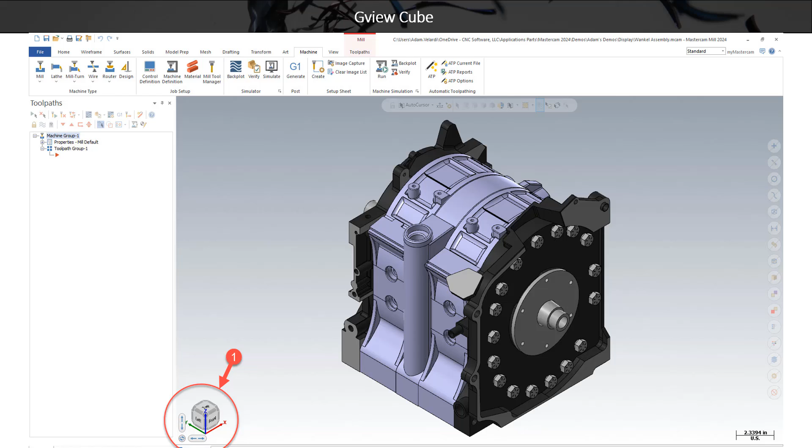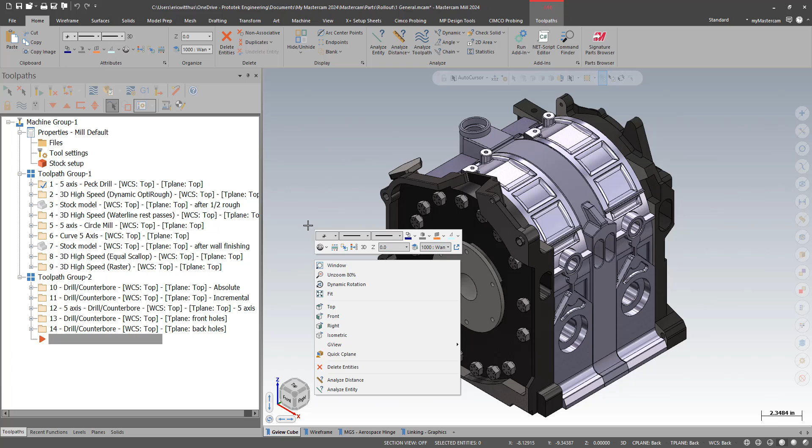So the first thing you can do with this new cube is you can, say, click on the right graphics view. That'll look at the right side of the part. So you can simply click on the cube and go to that graphics view. Now this is the same as choosing the graphics view from the right click menu or from the view menu up on top. They are related to the current WCS.

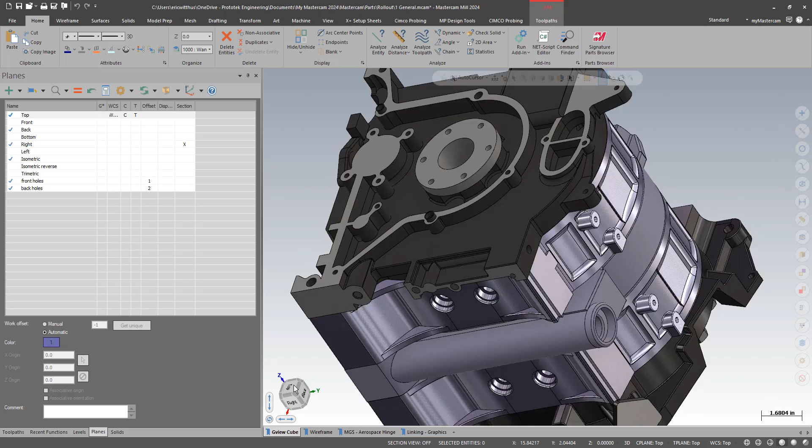So if you look right now, I'm at the top of the current WCS. If I go change my WCS, I'm no longer on the top of the current WCS and on the back. There's the top of the top WCS. Also, like changing your graphics views, it will follow your rules. So if you have rules set to change the planes with the graphics views, the planes will change as well. I have those rules mostly turned off.

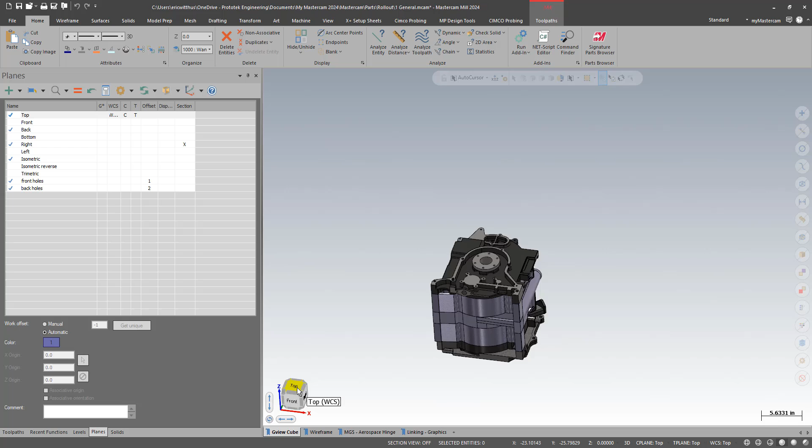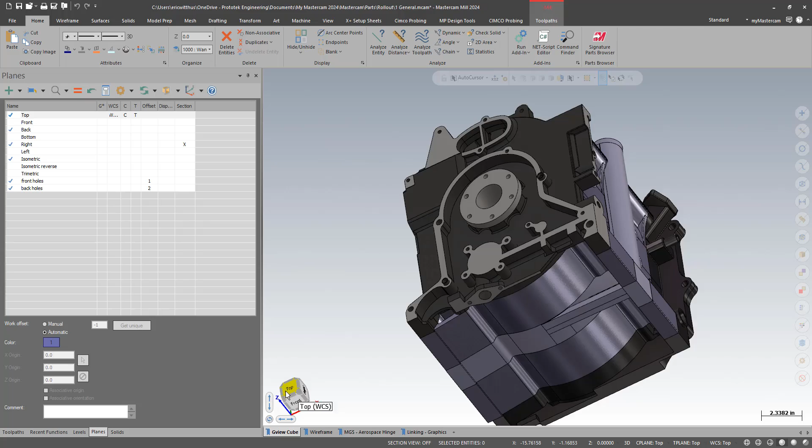Another thing you can do with the cube is you can double click on the cube and it will fit your screen. You can also, much like pressing the wheel and moving the mouse around, left click and drag your mouse around to rotate the part. So you can click on the cube, hold the button in, and rotate the part.

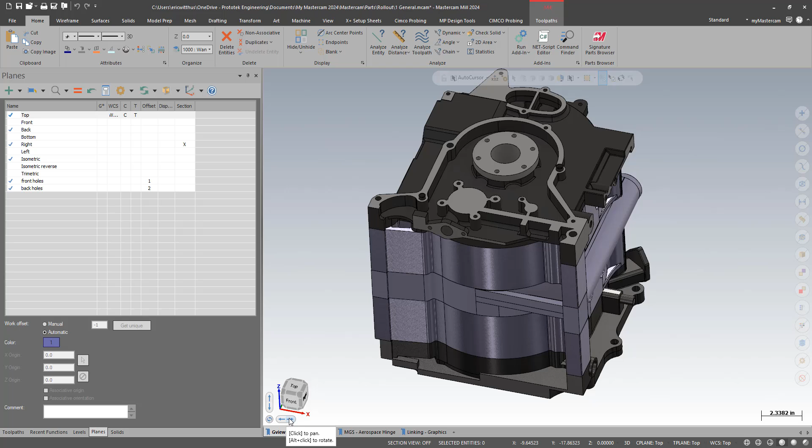There's also some additional buttons near the cube here. I have some up and down arrows, left and right arrows. They pan the part. If I cursor on that for a second, I can see that if I press the Alt key and click on the arrows, they rotate the part. I also have another button here that does a 180-degree flip on the part. And if I cursor on that, I see that that has a variety of options as well.

We also have a right-click menu with this. I can turn off the cube or right-click show the cube. I also have settings in here where I can change the size of it and the translucency. So that's the new Gview Cube for Mastercam 2024, just a new interface element.

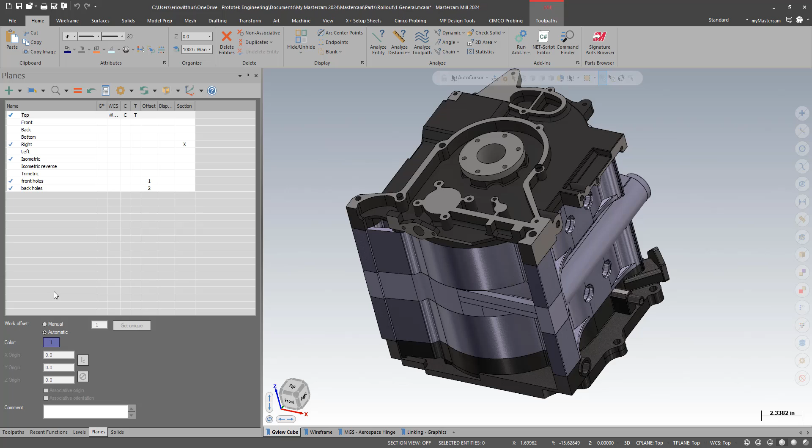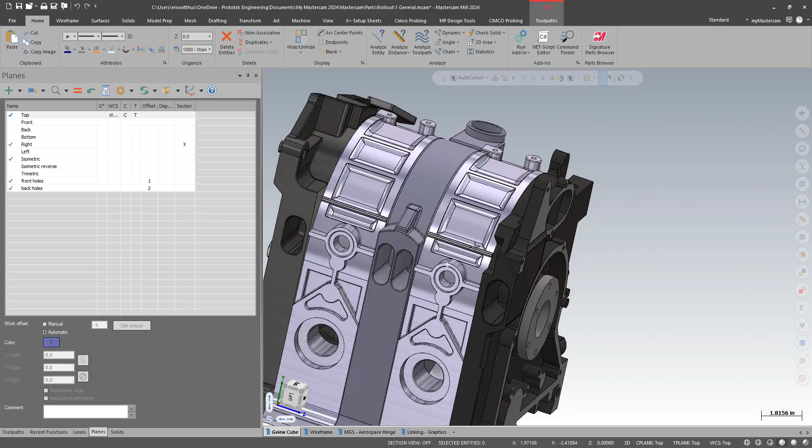Another new enhancement to Mastercam 2024 is they have changed how translucency works. There are no settings related to this. Just when I go to translucent down here in the corner, the main thing that happened is, an easy way to talk about this is to talk about shading. I have two different shading methods here. I have just plain shaded and outline shaded. And when I'm outline shaded, it looks like a wireframe on the model.

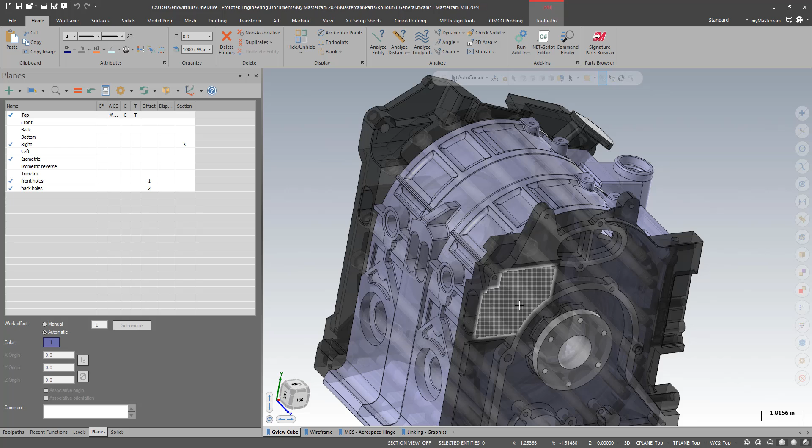I do like the outline shaded. I think it's easier to see the definition of the shapes, but it's putting those wireframe looking edges on everything. And in past versions when I went to translucent, those edges stayed bold. They didn't change. Now in 2024, when I go to translucent, the outline shaded edges also go translucent, making it a little bit easier to see into the model.

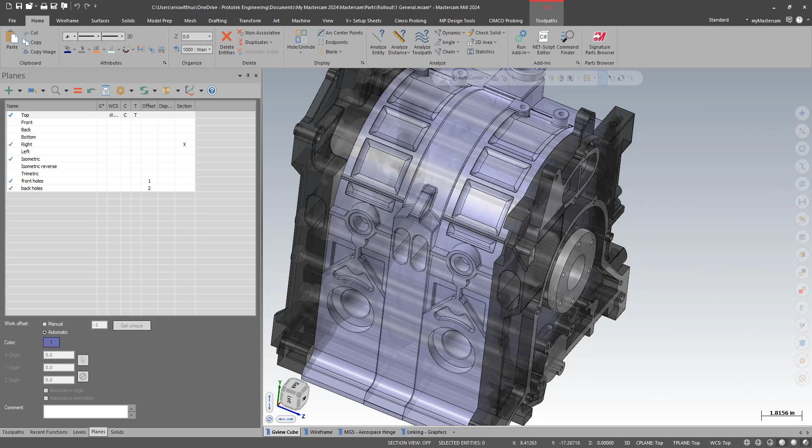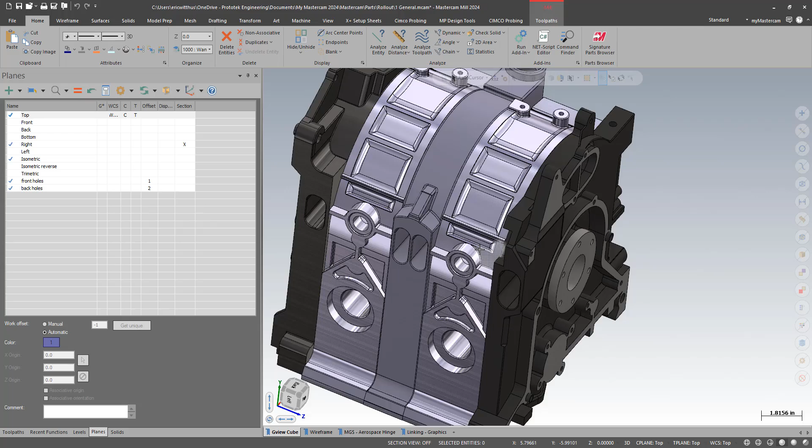In running the rollouts, not many people are using the material function. The material function is really just a graphics enhancement, but there is some functional use for it as well. So this is not new for Mastercam 2024. We've had this for a few versions, but I can now go to view and I can turn on view material.

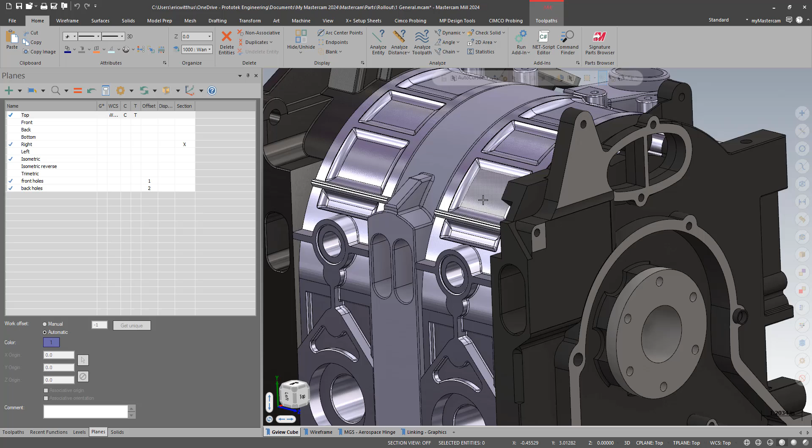And then I can set various materials in Mastercam. So right now these are mainly metallic materials, so they kind of appear shiny. So it's really a graphical function, but where it can come in handy or be useful in a practical sense, not just in the way it looks, is I have glass material types.

So we just looked at translucency, but that's everything. Everything's translucent. Maybe I have an assembly like this and I just want a few components translucent. That's where glass comes in pretty handy. So I already have my material turned on in the view page. So now, for instance, I could pick that part of the assembly right there, and then right click. This also can be found on the home page, and I can set that material.

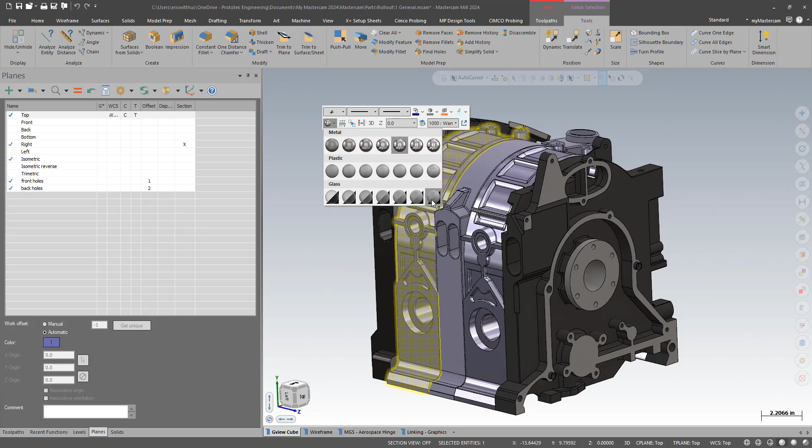And then I have various levels of translucency inside the glass material as well. This is the least translucent, so I'll set that, and now just that one component is see-through. I could pick that one as well. Maybe I'll go kind of to the middle of the range of translucency there, so that one's more translucent. Maybe I'll pick this front plate here, and I'll set that one to this one.

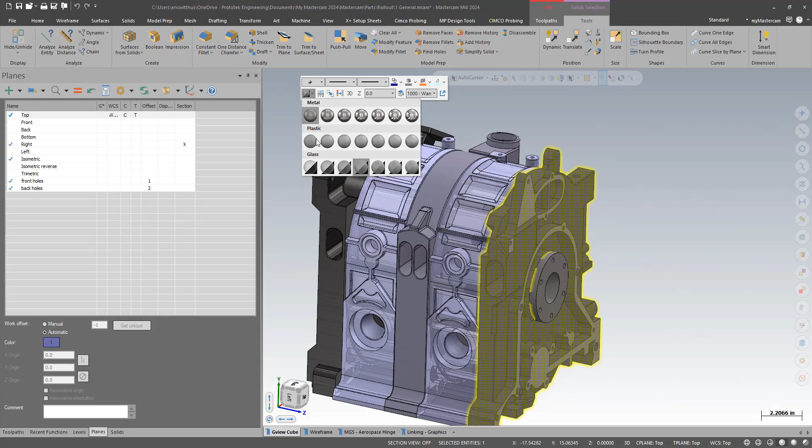That's the most translucent. So that's not new for Mastercam 2024. I just wanted to show some practical uses or give you some ideas of how that could be used. What's new is in the config, there's a translucency slider for the glass material that affects the overall translucency of these.

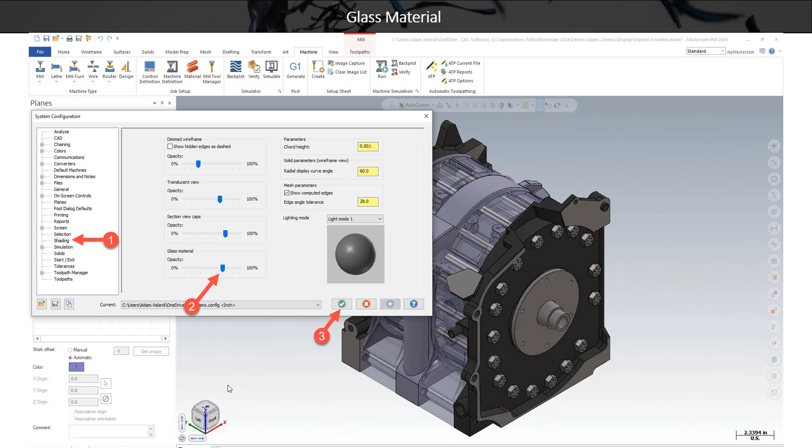Next up, we have some dynamic trim enhancements in Mastercam 2024. If you've been using Mastercam for a while, remember the old trim break extend function. This is basically very similar to that. They added a new trim function to the wireframe ribbon in Mastercam 2024, and it's in the first place here. You still have your other trim functions as they were before. This just adds a new one, and it's basically like all the trims in one.

You do have a trim break function. It breaks, shortens and lengthens, but if you shorten it, it leaves the part that would have been shortened behind, so it turns one into two. Or if it lengthens, it creates a new line. And then you have all your different trim settings here. Now, there's what it kind of looks like in the interface. They did a little modification of wording here.

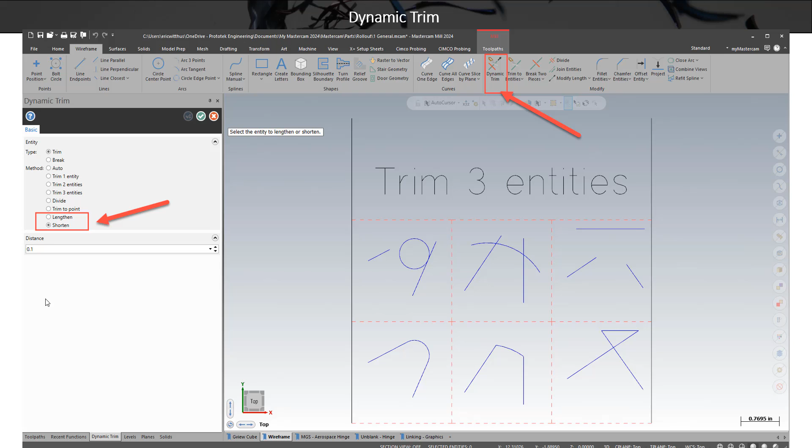It's not a functionality modification per se, but we always had modify length, and if you put a positive number in, it would lengthen. If you put a negative number in, it would shorten. And maybe that wasn't super intuitive to use a negative number to shorten, so they've changed the wording on it. Now it's lengthen and shorten, and it's always a positive number. No more negative numbers to shorten.

We also see some machine group setup enhancements in Mastercam 2024. In Mastercam 2023, you probably noticed, and we talked a bunch about it in the rollouts as well, they basically completely redid the machine group setup. At that time they mentioned that this is just the beginning. There was going to be more stuff as future versions rolled out. So we have additional stuff once again in this version. We see most of the changes to the stock page.

So for instance here, if I work my way top down, I can now have multiple stocks. I have some new ways of building stock, which are basically similar to some of the old ways we had that we lost in 23. They're back. We have the interface that we saw in 22 and older, where I have an anchor point and length, width. We did have this in 23 as part of the bounding box. We still have the bounding box function there. And we have some new push-pull functions that are pretty cool, specifically on the stock setup page.

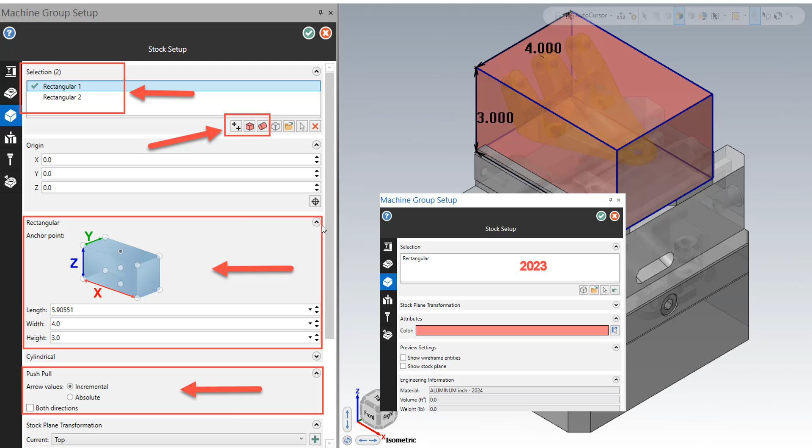So on the left is Mastercam 2024 machine group setup, and on the right, there was not much in the stock setup in Mastercam 2023. You really had to go into bounding box to get some of these options. Now they're back on the main page like they were in older versions. There are also some enhancements to the simulation page as well. Now we'll go back to Mastercam and take a look at all that. Since this is all pretty new starting in Mastercam 2023, I'd like to run through it all real quick.

So the main updates are on the simulation page and the stock setup page. But I'm just going to start on the file page, and this is where you can change to a different post if you want. The program number used to be on the tooling page. In 2022 it was, and last version it got moved here to this page. So you can put a program number in there.

I go to the master model. Now, what happened in 2023 is I did some of my job setup here, and then it was usually more often used if you were going to use machine simulation. You could set up fixturing and your machine simulation stuff by going into simulator options here. And instead of having two interfaces for this, what they did is they took all this stuff and they moved it into the job setup.

So if you're not doing machine simulation, you don't have to. When I get to here, for instance, my master model page, I don't have to set that up. Mastercam has a default mechanic where whatever levels you have active when you run simulation or run verify, those components go into verify and they're considered the model. And then once in verify or simulation, you can hide or make the model translucent. But basically everything that's on the screen is going to go in as the model.

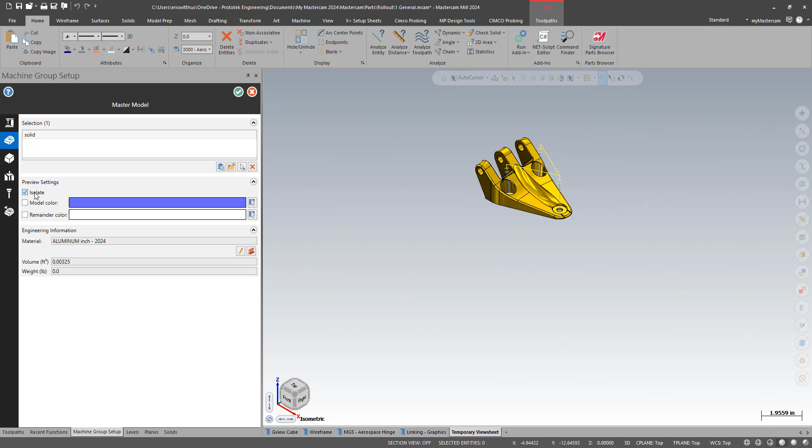So here I can just select from my screen. I can say that's my master model. I can do some stuff here. I can isolate that. I can force a certain color on it and a remainder color to help identify it. You can set a material here, and that just gives you the volume and weight. But I'm going to move on down to stock setup.

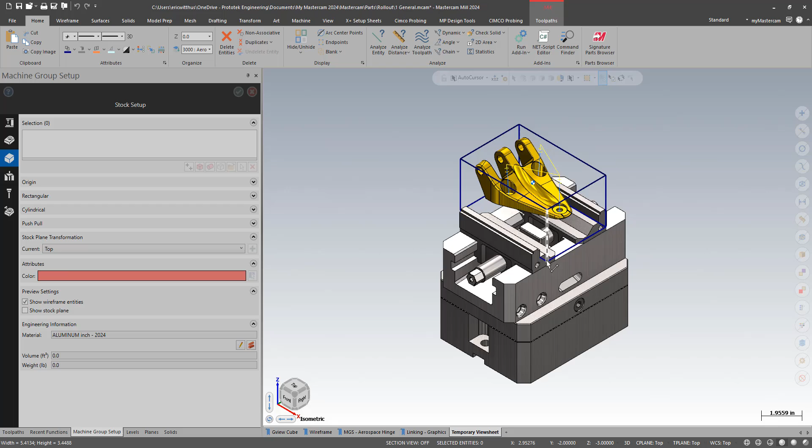Here's where I see a lot of my changes. One of the things that I used to have in Mastercam is I can make a stock from 2 points. So that's back here. I can say add from 2 corners. I can make from that upper left-hand corner to the bottom right-hand corner. Get my stock in there, and then I have my anchor point there on the center. I could do something like go to a 7-inch stock, and it evenly expands. So I got that interface back, and then I have some more stuff too.

I'm going to come in here and say create rectangular stock about that part, and then I get a minimum bounding box there, but that's just to create a rectangular stock. I also have my bounding box function, which is the same as the previous versions. It takes me into my bounding box dialog, which now has a lot of similar things to this.

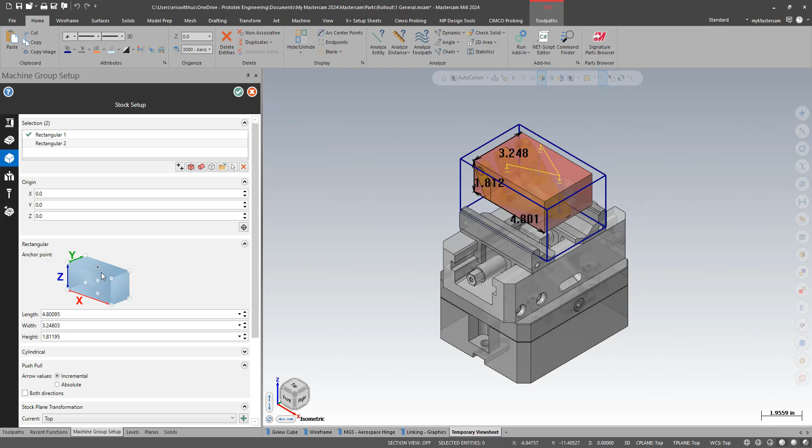So now once I have that stock made, you can see here I also can have 2 different stocks. Now that doesn't mean that they're both active. Only one will ever be active. So whatever the top one is, that's the active one. If you want to set another one as active stock, you can right click and set as active stock.

So this isn't really for Vise 1, Vise 2. I would probably still use stock model for that kind of stuff. This is more like maybe I made this part this time around with this size of stock, and then the next time I had to make it 6 months later and a different size stock got ordered.

And maybe next time I'll go back, so I could have different size stocks in there, and then switch between them as needed. I have some tool paths that work off a stock that could be affected by that. Like if I do a dynamic mill and I don't pick a machining region, it goes off the stock. Facing can go off the stock, so those would go dirty as I switch stocks, and then could be regenerated and updated to the current stock size.

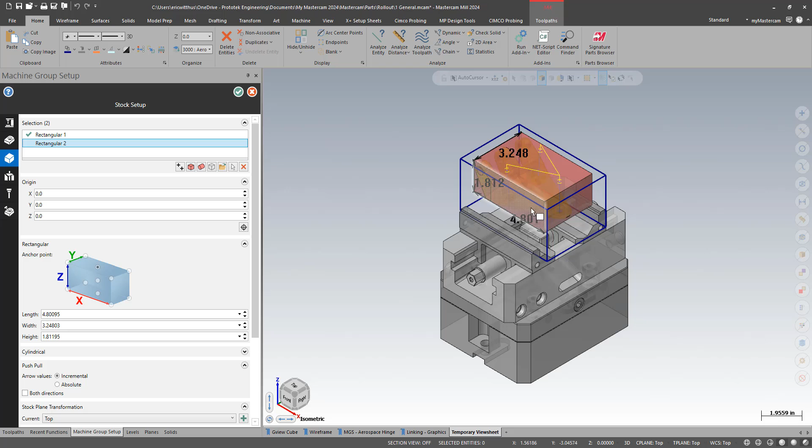But they're not simultaneously active, they're not both active at the same time. I can have multiples in there. Only one is ever active though. Whatever one is lit up here is the one I'm dealing with and editing on the screen. So I have the second one. There are some other cool things on this.

I can do stuff like push pull now right from here. Now this isn't completely new because you can do this kind of stuff when you're in bounding box. When I do push pull, you can see I'm incremental. I dragged that face up a 1/2 inch. I can also now push pull absolute. Down here I've got the push pull function, and I switch from incremental to absolute, and if I drag that now, look, it's starting at the actual size it's at now, and then I'm dragging it to actual size numbers.

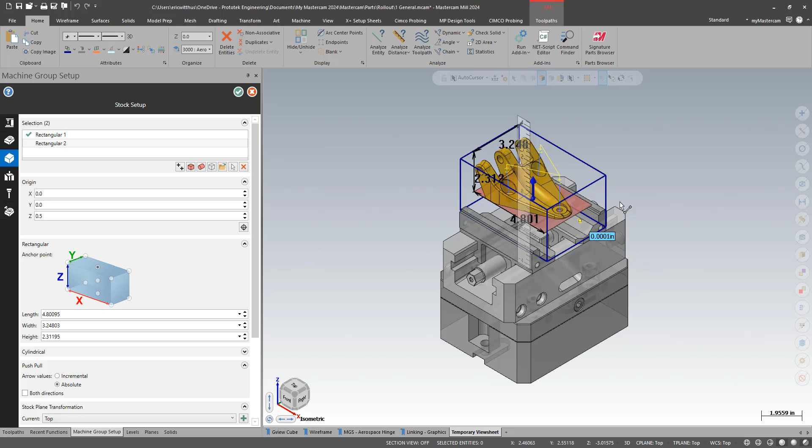Where that could be handy is on this outside. Maybe that's the overall length, and I could drag it to a nominal number. Now that's only going to drag the one side though, so there's another new option in push pull here where I get both directions. So now I could do something like absolute both directions. If I click on this face, I could pull it at kind of an odd number now. If it was an incremental value and I wanted to bring it to a nominal size, I'd have to do some math and figure that out.

But here, if I drag it now on absolute and both sides, I can drag it evenly on both sides to a nominal number. So I could drag this out to, say, 6 inches. Now I'm 6 inches overall, and it's centered. I drag both sides. So that's some cool new interface elements there on the stock setup.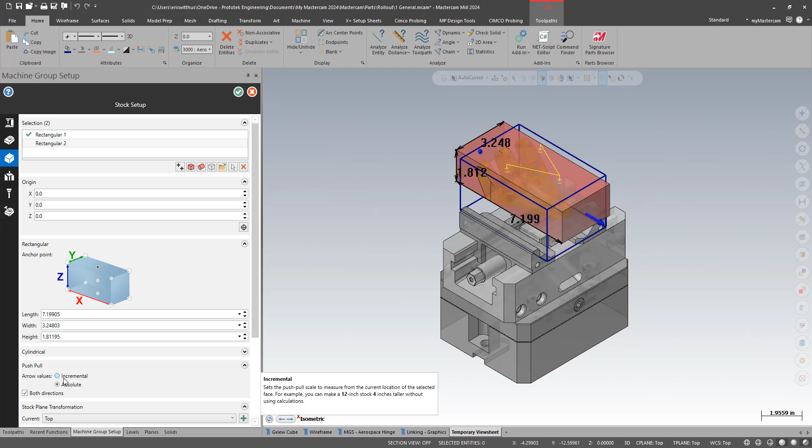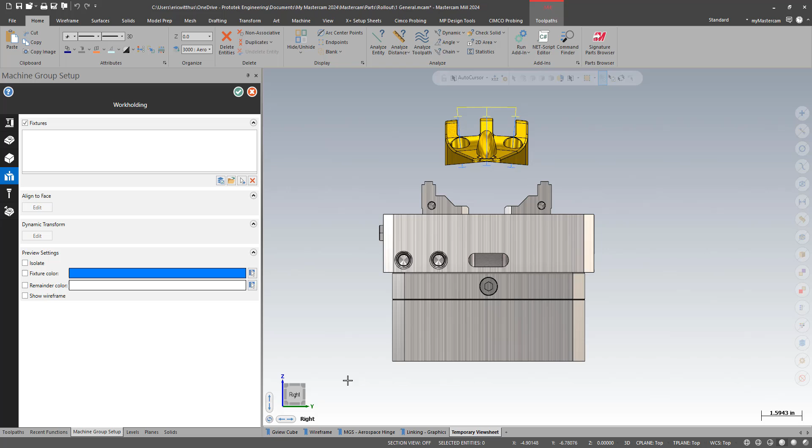Also in my stock setup, I have work holding, and this is for my fixturing. So I can define my fixturing. Once again, you don't have to do this, but if you go into simulation or verify, this allows you to turn on and off the display of your fixturing separately from your model. So I can select from the screen. Same stuff here, I can isolate it. There are multiple components here, so I can shift click to isolate them all. So there's my fixturing. I could also set a fixture color and a remainder color to help see it.

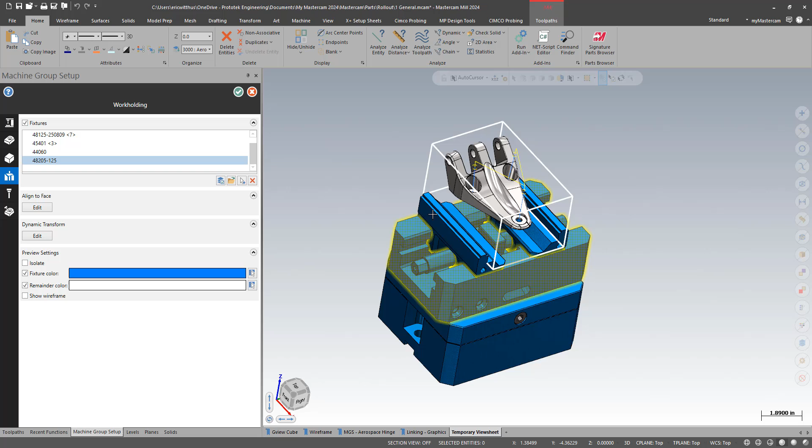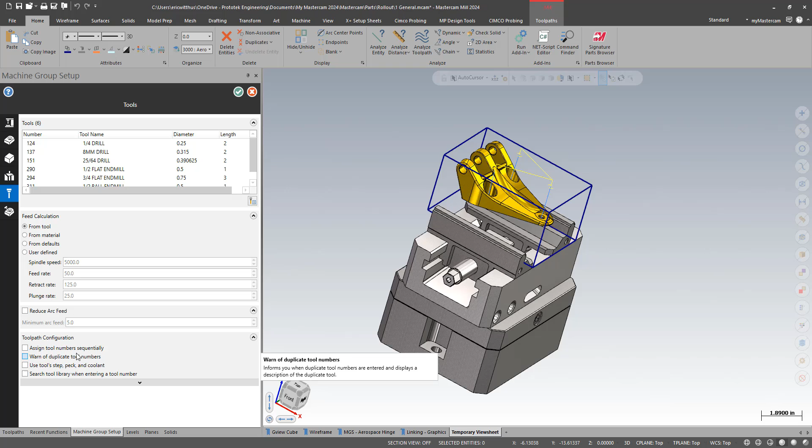Same kind of stuff we saw on the master model. You don't have to do this. This was new in 23, or I mean, we had this kind of functionality to a degree in 22 and older, but it was in the other interface, the simulator options button. So here's fixturing. My tool page didn't change a whole lot from 22, 23, 24. And now I do have some changes down here on my simulation page too. I'm going to green check out of here real quick.

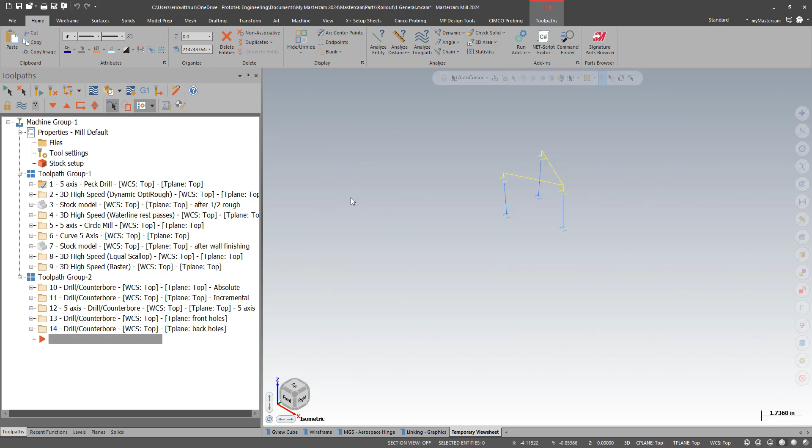One of the main things is maybe I have a stock model I want to verify from. I used to come in here into simulator options, and then I could switch it from my stock setup to a stock model. Well, now when I hit the simulator options button, there's no more separate pop-up. It takes me right to the simulation in the manager here in the panel interface. And then here I can do my stock override. If I have multiple stock models, I can hit this little red button here, and then I can pick which stock model to use for my simulation.

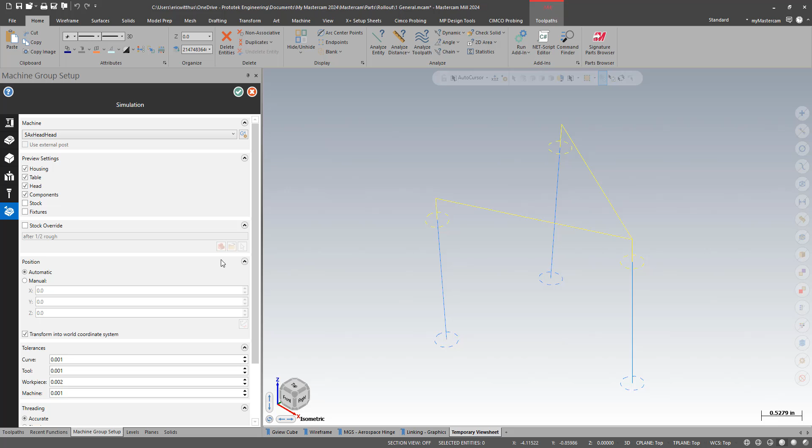I'm going to turn that off. That's a little bit different place and interface for that. So that's my machine group setup in Mastercam 2024. A couple new things in there and a little bit of review.

There's also another cool function in Mastercam 2024. Sometimes these little interface enhancements are some of my favorite things in the new versions. Some of the past things: I really liked it when we could start drilling by picking the walls of solid holes a few versions ago. And I really like the temporary midpoint function that we gained, where you could hover over 2 spots, and then it gave you the midpoint.

It removed having to draw things to get that in previous versions. This is kind of one of those enhancements. I'm really gonna miss it if I'm not in 2024. I just showed you how you can set up a stock model for simulation. There's a shortcut for that in 2024. Now in Mastercam 2024, when I pick operations for simulation or verify, if the first operation is a stock model, it will automatically use that for simulation.

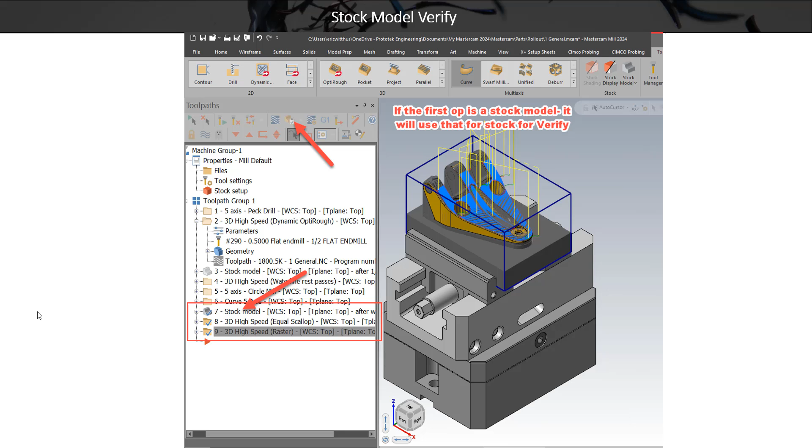So let's take a look at that. I just want to verify that I'm back to just my core cube on my simulation there. So if I hit verify for that operation, I'll just get my square block of stock. Yep. So what's new here is I have this stock model here, op3. I can see it on my screen there. The roughing's been done, some drilling.

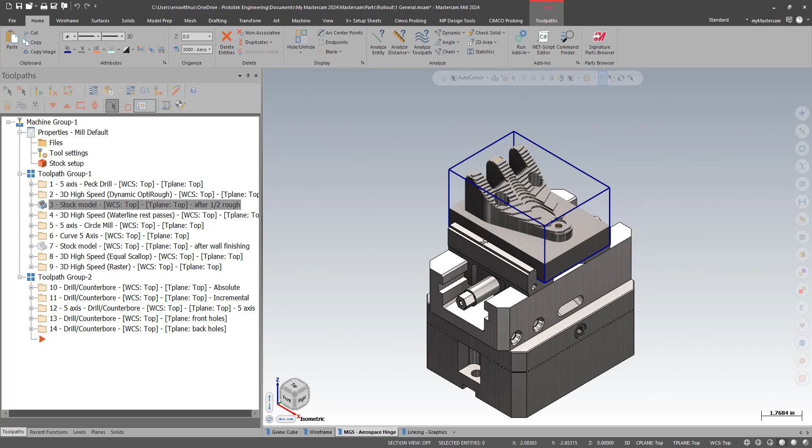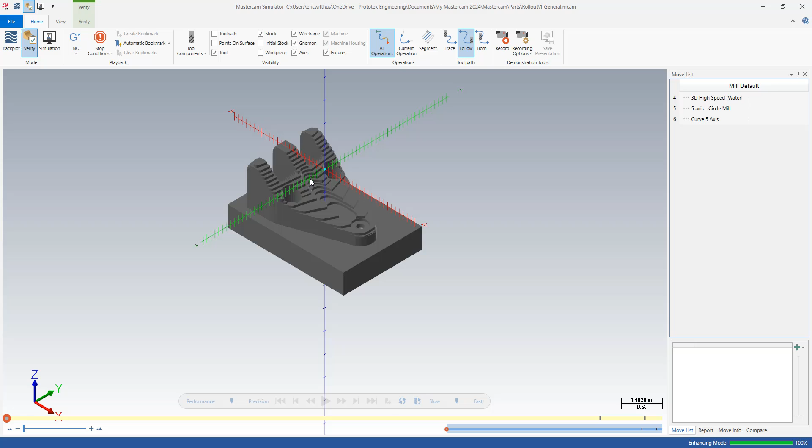If I pick, say, 3 to op6, because the stock model is the first one. If there's other stock models in there, it's not affected. It has to be the first one in numerical order. And if I hit verify on that, without having to go into any settings or do anything, it uses that as my starting point for verify.

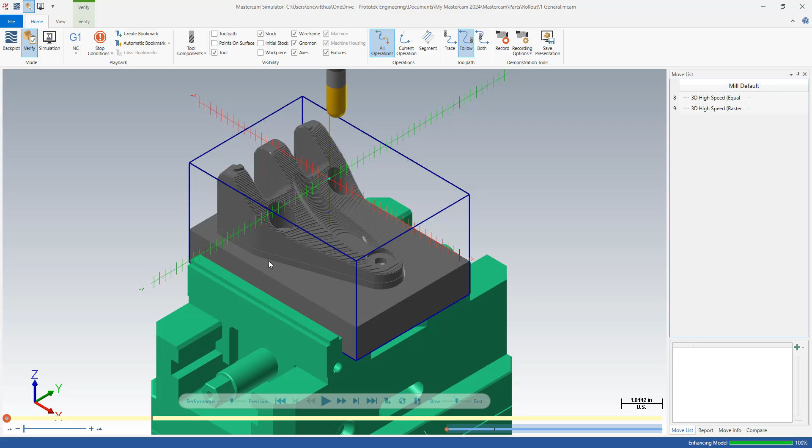And then just to throw it in there again, after those toolpaths, I roughed it a little bit better with a waterline toolpath, a smaller step down. So I can pick 7 to 9 and verify from there. And then I'd verify from that stock model. It's got just a finer step in it. So that's pretty cool. It makes sense.

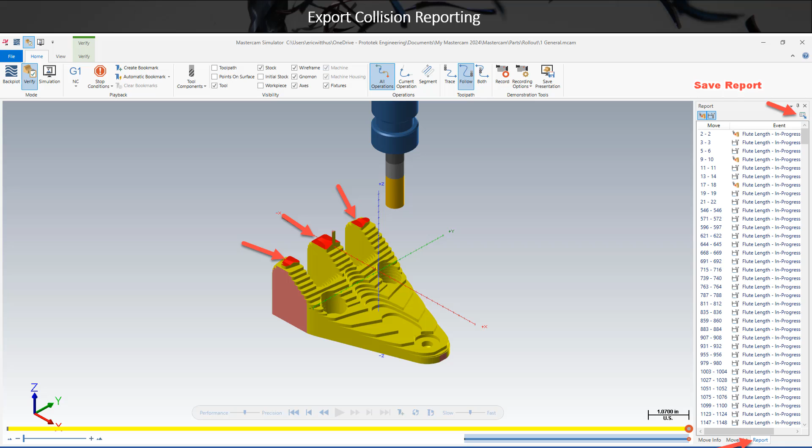Since we're on simulation, there are some simulation enhancements. Simulation for as long as I can remember has had collision detection in it and collision reports. But what's new in 24 is I can now export that report to a CSV file. It's the same info as in the report. That could be part of your process, where that gets saved with the part file, so the person setting it up or running it can take a look at that and see that everything cleared and everything looked good.

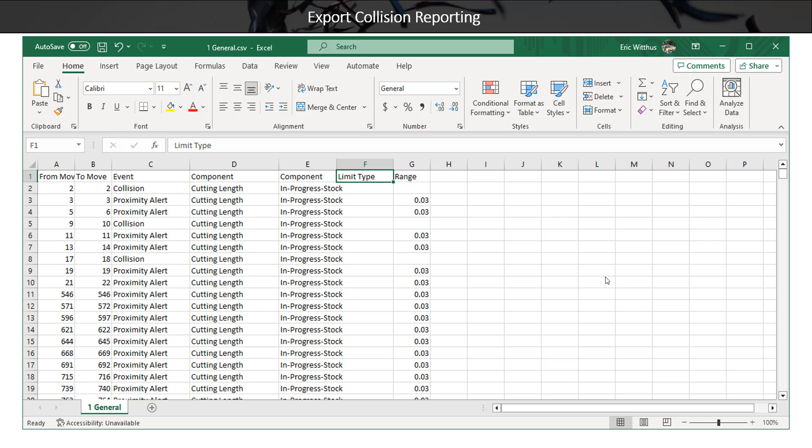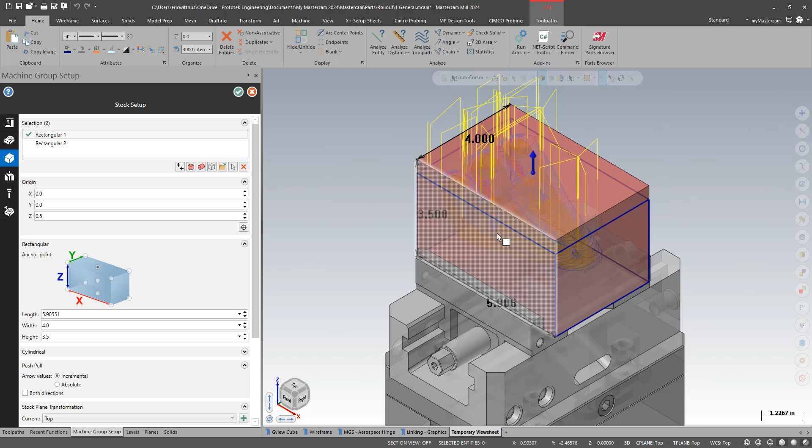There are also some enhancements to my move list and some graphics options. So let's go back to Mastercam and take some looks at this. Before I do this, I'm going to go into my stock setup, and I want to make some collisions here. I'm going to start with this stock, and I just want incremental in one direction. Just add a 1/2 inch of stock to the top of the part. I have some drilling passes and roughing, and they didn't account for that extra 1/2 inch of stock, so that's going to generate some collisions.

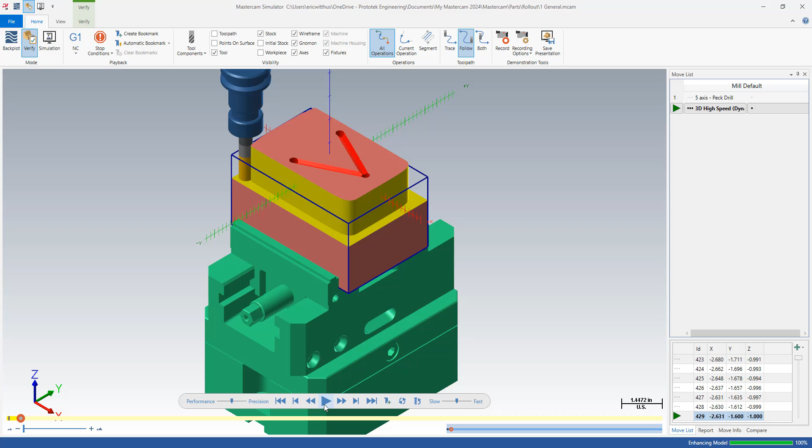I'm just going to verify this drill and this OptiRough. Depending what settings you have on, it could be easy to miss collisions. If I hit play on this, my drill retract wasn't high enough. It was still in material when it was rapiding between holes, so I get the red collision marks there. But this could be pretty hard to identify depending on how fast I got my simulation going, or if I hit the advance ahead button. All those collisions do get machined away, so it can be hard to recognize that collisions happened. You have to be a little bit careful.

What's new in 24 is I can create a report on the collisions, but what I want to show people is some of the options. This is a good excuse to show you how the collision stuff works. So if I go here to verify, first off, I have to have collision checking on. I have some options in here, whether or not it does proximity alert. That's the holder can only get so close to the material. I like to turn that off sometimes.

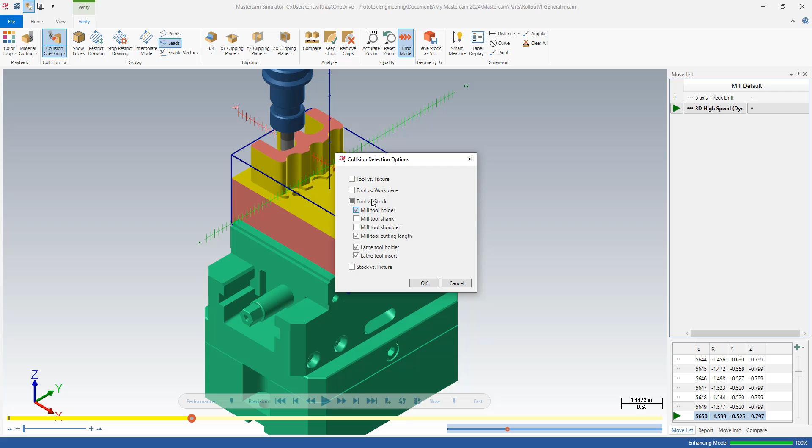I can also clear my list and adjust my list to show them or not. And then also real important here, I have some collision options. So some things may not check as a collision. By default, not all the different collision checks are on, and you can make adjustments there as needed or whatever suits your needs. So first off, it has to be on. There's some options for it.

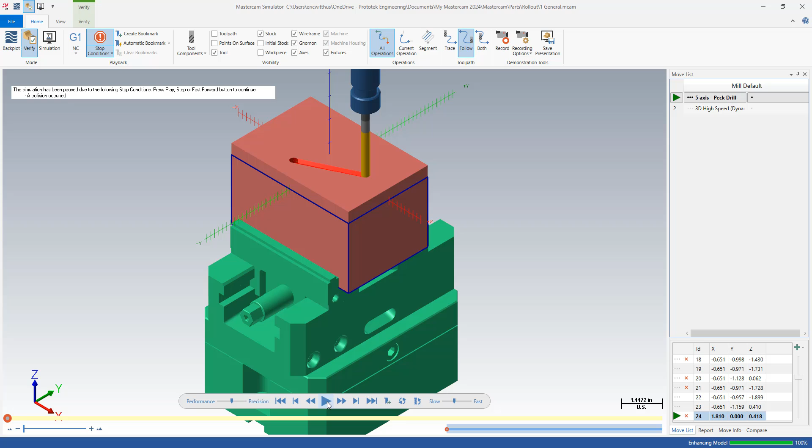And secondly, I'm going to rewind this toolpath. If I come back here to the home page, I have stop conditions. And one of the things I can do is I can stop on an event of a collision. So this can make it a little bit easier to catch. Now I get collisions here right away because even the starting height wasn't high enough, and basically every time I hit a collision, I got to hit the play button again or the advance button again. It stops the process for the collisions.

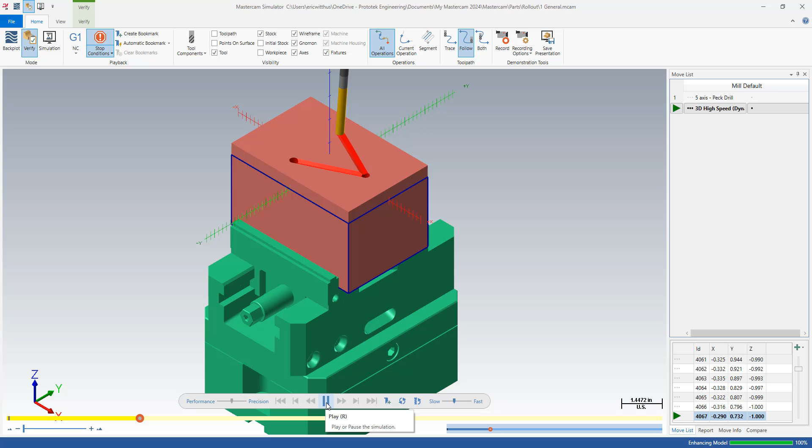Now I've added quite a few collisions in here, so I'm gonna turn that off. But you just notice, it'd be easy to miss without that on, so you can pick how you want to use that. I'm just gonna fast forward this out a bit here and let it go for a few. So I got some collisions there.

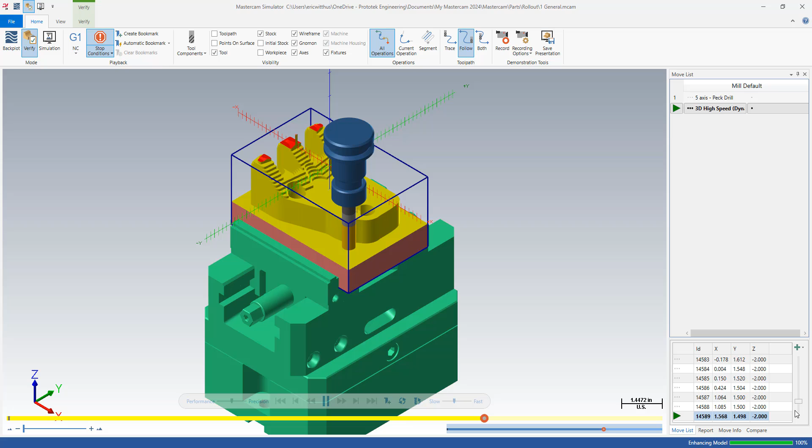I also end up with some holder collisions here with that extra 1/2 inch of stock, which with only these operations won't be machined away, but eventually, depending on what I'm running, if I was doing the finishing, those aren't actually hitting the part yet, so that could be machined away. So also handy here, I'll just fast forward to the end. I do have a report here. So here's my collision report, and I can click on any one of these collisions and move right to it.

It's kind of hard to see why that's a collision right now because all the material is gone, but that extra 1/2 inch of material was still there when this was running. So the tool was still buried in the material. But I can click on the report here. Another thing in the report, I can view the proximity alerts and collisions or not. So I could turn off the proximity alerts.

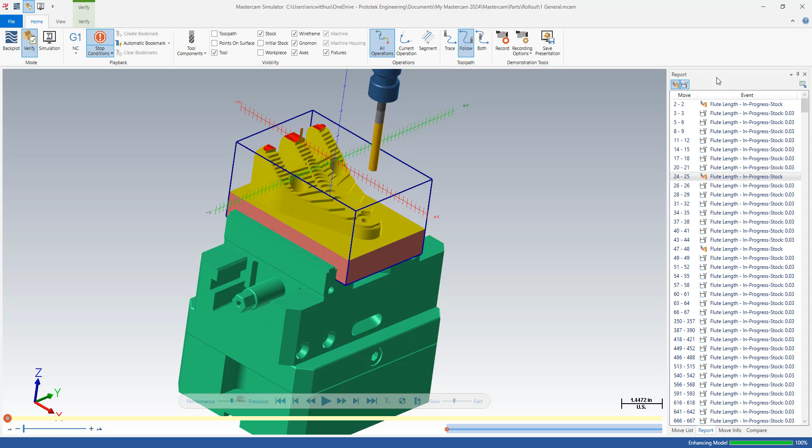If you look at the size of my scroll bar here, I got a fairly big report. If I turn off the proximity alerts, my scroll bar got much shorter, and these are just the actual collisions per what's set as a collision in my options. And then what's new in 2024 is I can hit this button here and save this to a CSV file.

So I just wanted to show a little bit about how the collision stuff worked, and what's new is the report. Also, this report is on the view tab. And whether or not I have the report on, I have several different reports and panels I can show here. You do want to be a little bit careful with this. This interface is just like the Mastercam interface in the managers panels.

You can tear them off. You can have them on a separate screen. I don't like having too many on this screen. It eats up space real fast. But if I have it docked, I can drag the name to the name, and they kind of go on top of each other, and then I got tabs.

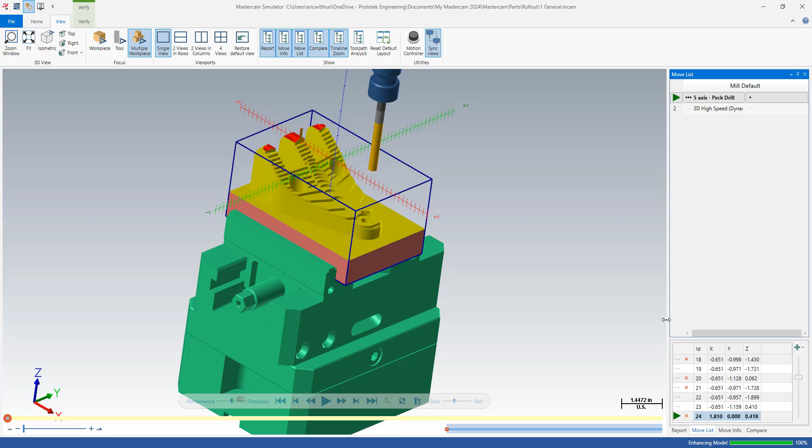Also new in 2024 is this move list here. I've generally only gotten some basic information in my move list. This is like every move. As I'm playing, I can click around here, and as I'm playing, it scrolls through here. What I can do now is there's this plus button, and there's a bunch more info I can include in the move list. This is also in the machine simulation portion of 2024 as well.

I can get machining time. That's approximate machining time. It doesn't account for acceleration, deceleration for that single move. Move length. There's some different options. I get way more info available to me now here in 2024.

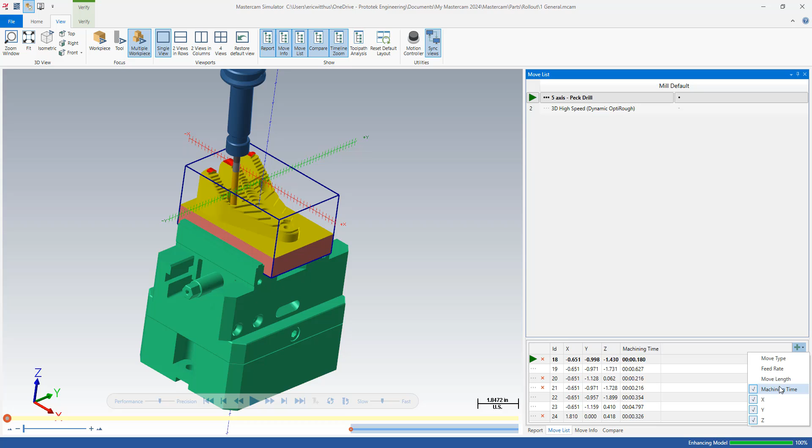And the last new thing in simulation in 2024 is just kind of like a config option. If I go here to File Options, I've always been locked to have the exact same background color settings as my Mastercam. Now I can turn that off, and I can set individual settings for the graphics background here in Verify.

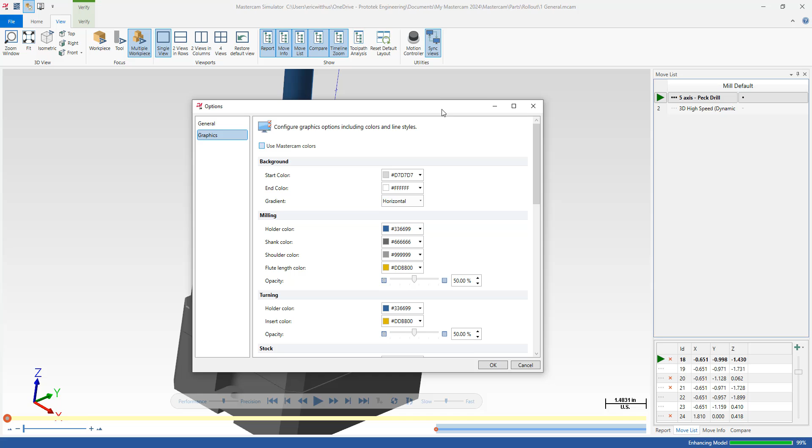This is also a nice enhancement in Mastercam 2024. It just makes sense once you see it. It's just kind of a little interface thing again. So it's an interface graphics update, and also a little bit of an interfacing update too, a new way you can do something. I get a graphical plane display for drilling.

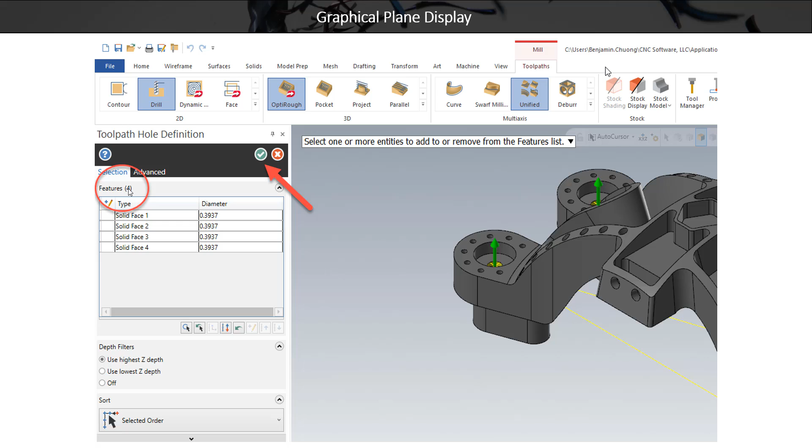Before I get to that though, there's another little enhancement here too. When I'm in my new manager for my hole definition for drilling, I now get a number of features here. So maybe here it's pretty easy to see I got 4 holes, but maybe I have 30, 50 holes. I can see how many holes I have picked, and then if I call it on my print, I can make sure it's a match to ensure that, yep, I got all my holes picked. So I got a hole count here, and then this is the graphical and interface part of it on my hole making toolpath. So like helix bore, drill, circle mill.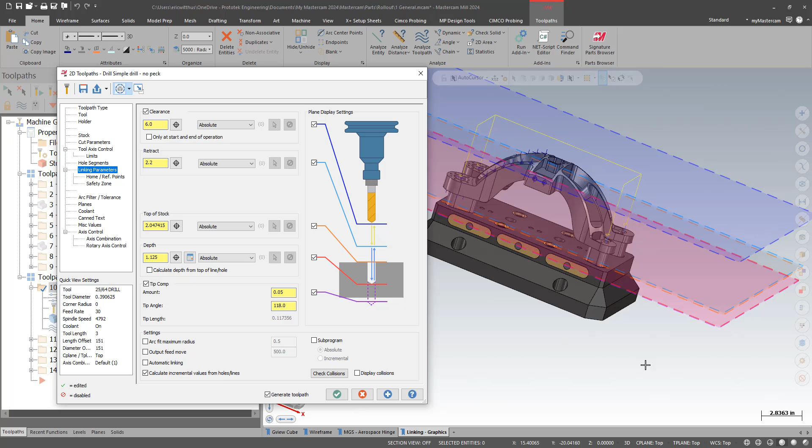Kind of cool here. I've always just kind of had to add my tip comp or look in backplot to see where I'm at. It does not give me a total depth here, but if I do get a plane for my tip comp, then coming down here, the red is my depth and the purple is my tip comp, so I can kind of see on the part where my depth is actually going to. I can turn on or off whether or not this is active, all of them or individual ones. I have the button up here to turn off the display graphical elements, to turn them all off. Let's take a look at a few more of these.

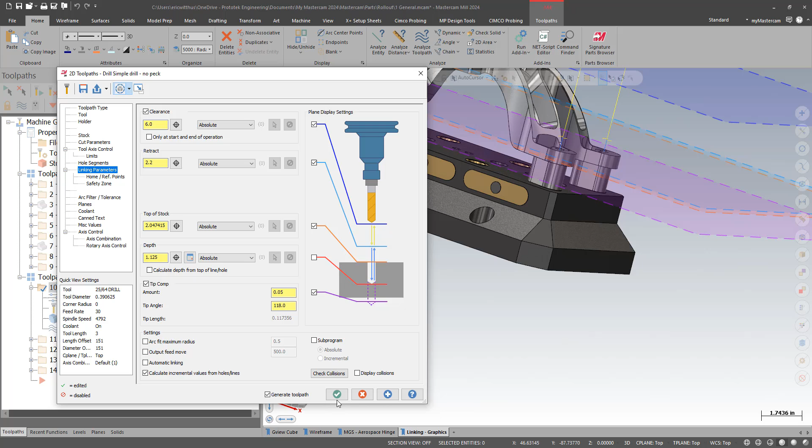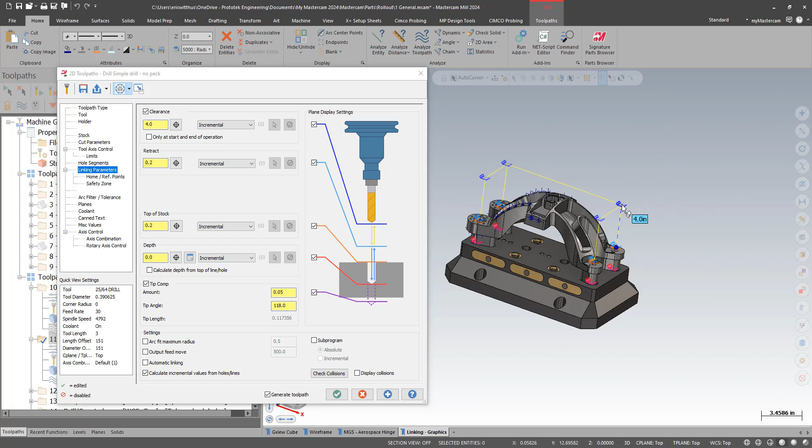This next one uses incremental. So when I'm incremental, it basically just gives me a little plane over every hole. Now, because all these holes are at the same depth, the planes are basically the same, but if they're varying depths, I could be, say, 4 inches above the top of the hole. So they'd always be all 4 inches, but they could be at different Z values if the holes are at different depths.

So that's the graphical part of it. I said there's a new interfacing part of it too. You can actually also click on these and move them around right off the screen. So I just edited it to 6 there on the screen. That'd be the same as coming in here and editing the value. It's just kind of a new way to interface with it too.

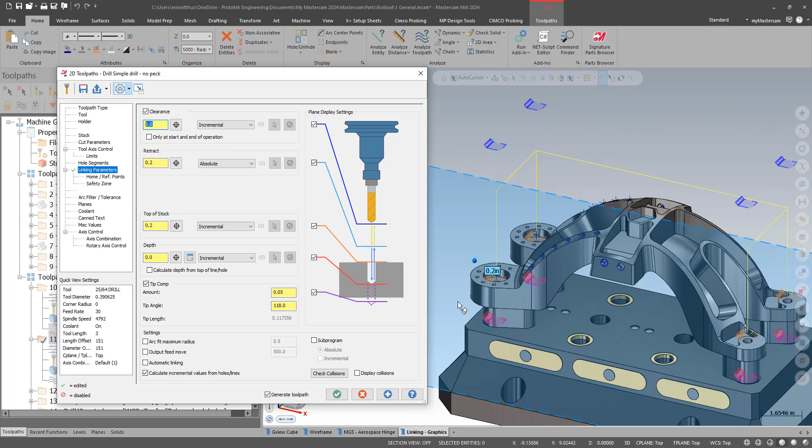And then of course this also works for 5-axis drilling. So here's a 5-axis drill one. Pretty handy, just a real quick look at it. Everything looks good. It just gives you an easy way to kind of double check what you're doing.

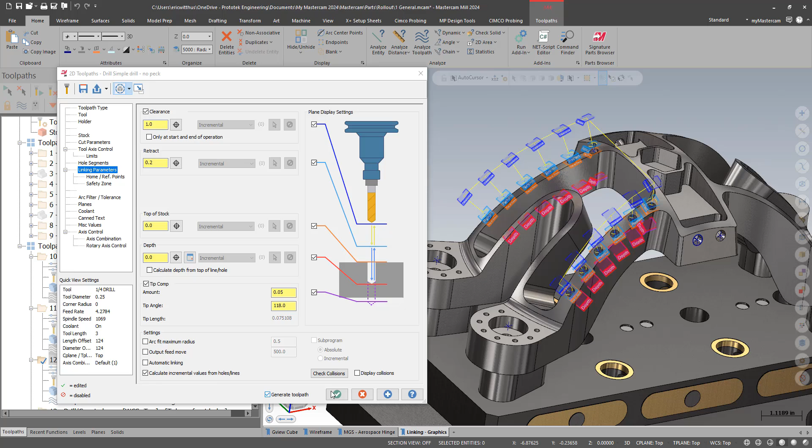There's also been an enhancement to edit common parameters in Mastercam 2024. Not certain if everybody's familiar with this function. It's a very cool function in and of itself. It's been around as long as I can remember. Back in the V days, it was there.

This is handy if you want to make mass edits. So say you got your operation defaults set for vise work, and then you do a job and it's clamp work, and your clearances are all too short to jump the clamps, and now you got 30 toolpaths, and you want to edit all your clearances to 6 inches or something to jump the clamps. Instead of having to do that 30 times, you can do it in one spot.

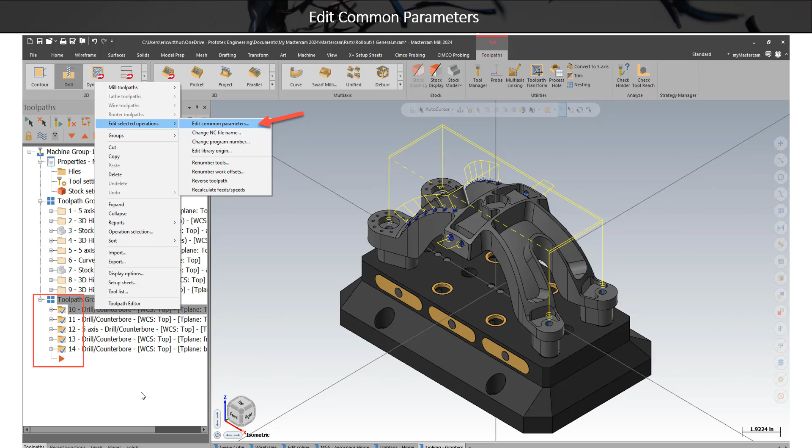So that's been around a long time. I'm going to take a look at that. But what's new in 2024... there's what the edit common parameters looks like. You pick, there I got several operations picked. It's edit selected, edit common, and it brings me into the interface.

But what's new in 2024 is that if you have multiple planes in use, it doesn't force them all to the same plane. It made it hard to say, maybe I had some indexing work done and I wanted to change my WCS to a different initial orientation in the machine. That was hard to do. You had to break them up into just edit the toolpaths that have the same T/C planes. Just edit those because it would edit your T/C planes. It'd force them all to a different one.

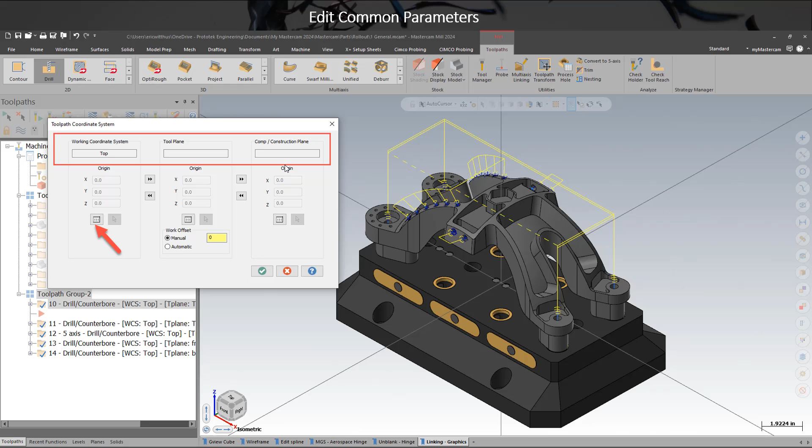What's new in 2024, if it has different T/C planes or different to any of these, it blanks it out. And if it's blanked out, it doesn't edit it. These used to be filled in. So it'd say like top. So I have planes using front and back. They would then be forced to top and be no longer correct. So here in my toolpath group 2, I have several in top, but then I have some holes done from the front, some holes done from the back. So that would be problematic in earlier versions.

If I want to change the WCS in this, maybe I have a new top or something where it's rotated 90 for how it's put in the machine. So now I can right click, edit selected operations, edit common parameters. And there's a little bit different interface in here. It's not every single parameter. It's the common parameters, the parameters that are the same in every toolpath. In case you haven't used this much, I just want to go through what it looks like in my first example I gave.

Say I want this to jump clamps. So maybe I want to adjust my clearance. I want to change my clearance to 6 inches. So that's pretty straightforward. But then some of these other ones, use and when, and so use: no change, enable, disable. Now, if you think about this, some of my toolpaths could have clearance off, some could have clearance on. So use no change, I would leave it alone. If it's off, it's off. So it wouldn't get edited. It'd stay off. But maybe now I'm jumping clamps. So even if it's off, maybe I want to make sure it's on.

If I switch it to enable, that would force it on in every operation, even if it's currently off. And then the when to use it, that's only use clearance at start and end, or always use clearance. Once again, some toolpaths could have one setting, some toolpaths could have the other. So I could say no change, leave that setting alone, or I could force them to always use the clearance. No matter what it was set before, it would be forced to that. Same thing for incremental absolute. Some could be incremental, some could be absolute. I could just leave that alone or force it to a certain setting. So that's kind of the first example or how that's interfaced.

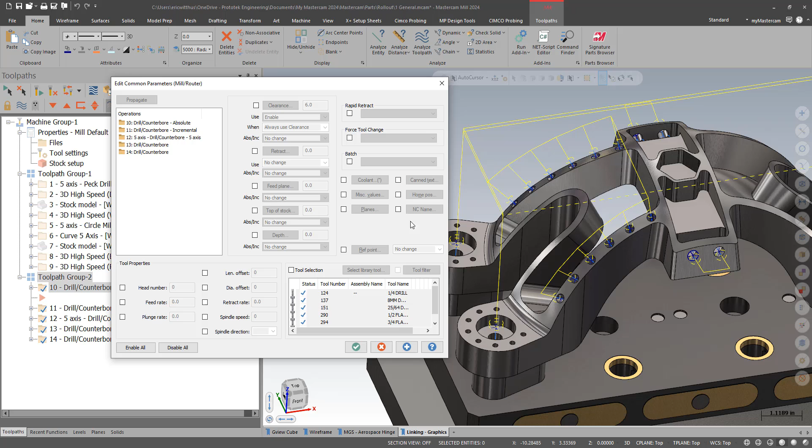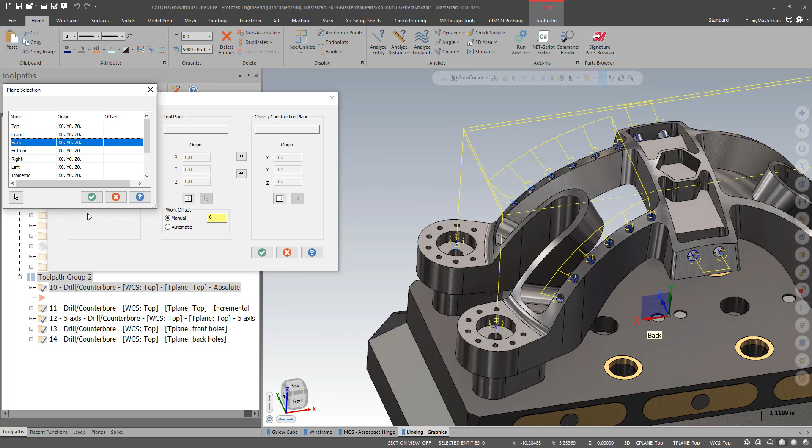Now they're all edited WCS back, but they still had the T and C planes that they had before I made the edits. So that's what's new in 2024, making that edit common parameter way more usable for editing planes. And that completes our Mastercam rollout video for the design and interface changes for Mastercam 2024.